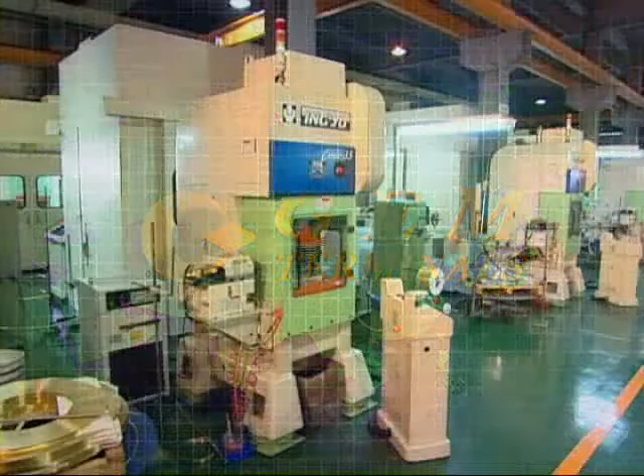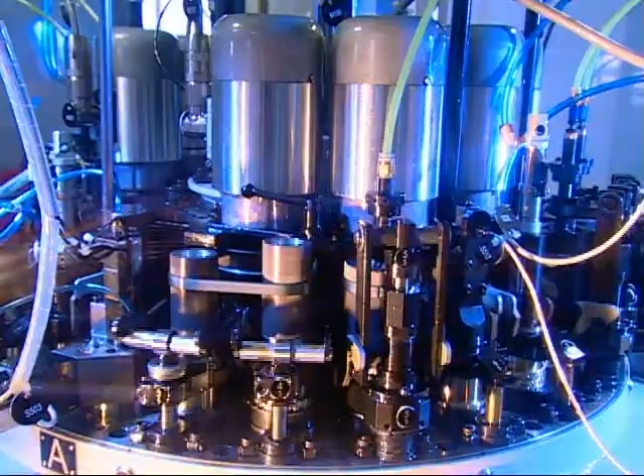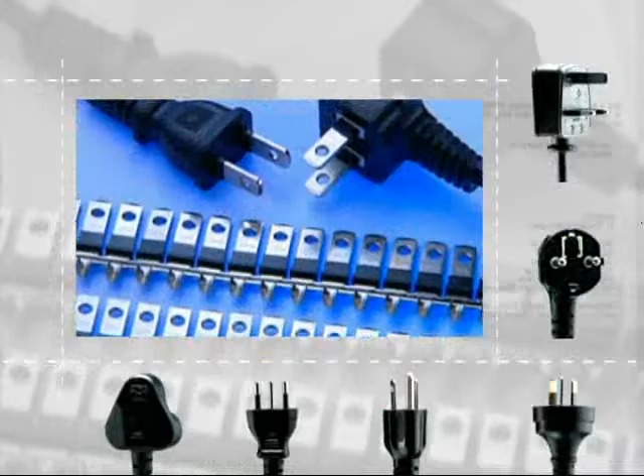It not only has the manufacturing capability with integrated turnkey operation, but also has advanced machinery facilities and capability in molding development with various kinds of products with superior quality, and has gained certificates from many countries so as to effectively provide its customers with satisfactory services, whatever aspects in the scale of operation, development capability, and the precision of its products. GEM has been considered as the best in the trade and has become the best cooperative partner in its customer's mind.

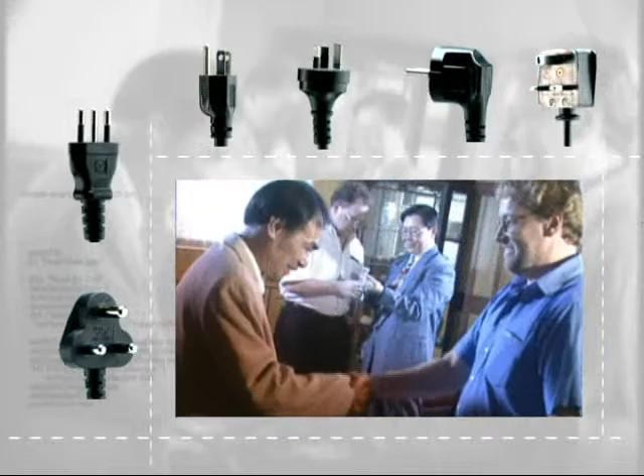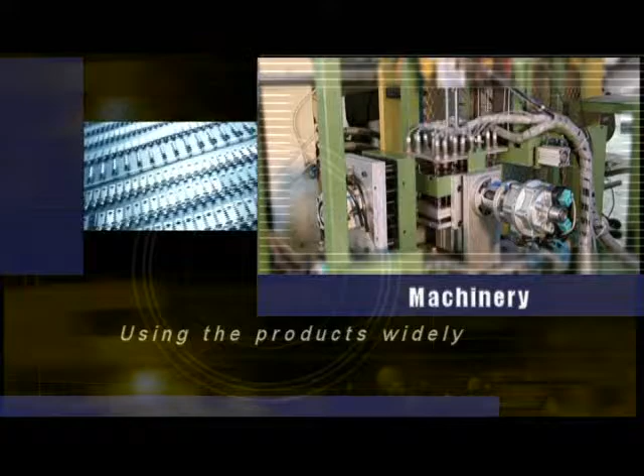Terminals are metal accessories that can be used to connect both electricity ends and can be widely used in electric appliances, products wiring, or telecom transmitting wiring for electronic and information products. They can even be extended to downstream application industries, including information, electric machinery, automobiles and motorcycles, power source plugs, telecommunication, architecture, machinery, measuring instruments, and lamps lighting, as well as others. You can see them everywhere. Terminals are truly small parts, big works.

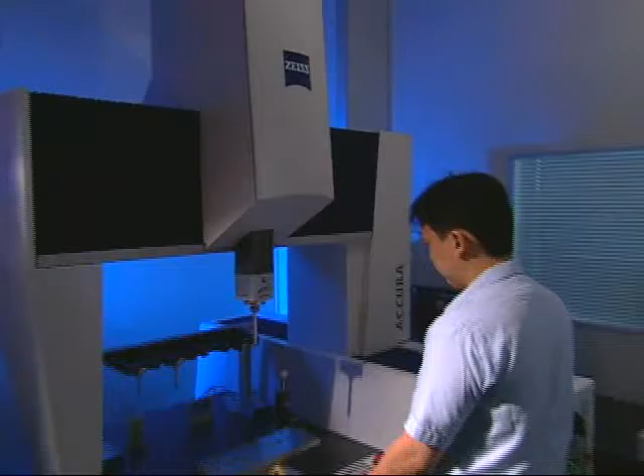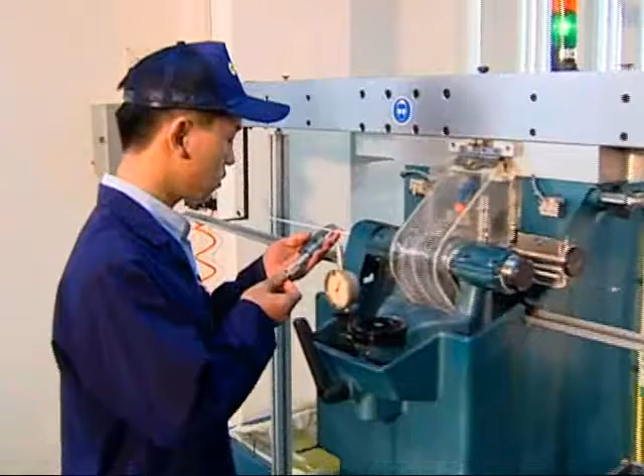Tiny as a terminal, what it can influence is a product and even the whole system. GEM has dealt with every terminal with attentive attitude and strict making process. From the primary products research and development, GEM has collected a strong technical team and continually accumulated experiences by progressively making information interchange with both domestic and foreign academies and institutes to continue developing the molding and manufacturing of new products, and also assist its customers to develop new products with its experiences of more than 30 years.

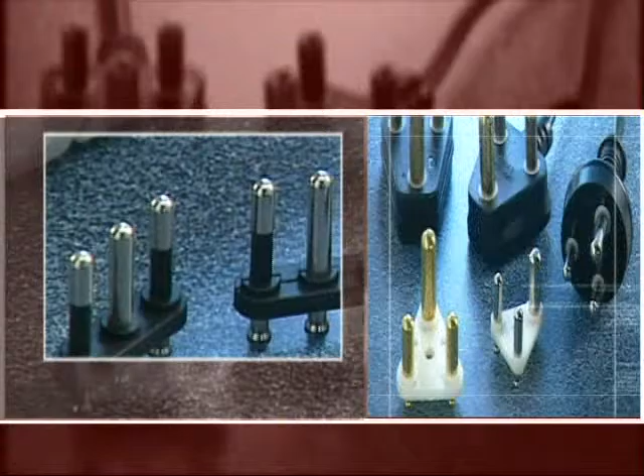The kinds of terminal are so numerous that they cannot be entirely developed, but under GEM's great effort and in coordination with the overall development of the domestic industries and conforming to the demands from the domestic power line factories, GEM has successfully developed its terminals applied to electric appliances like plugs. GEM's products have already contained the world's 4 major systems and has become the largest plug appliances terminals manufacturer in Asia. In order to satisfy the customer's requirements and to be connected with the market's trend, GEM has made its untiring efforts to continue developing new technology.

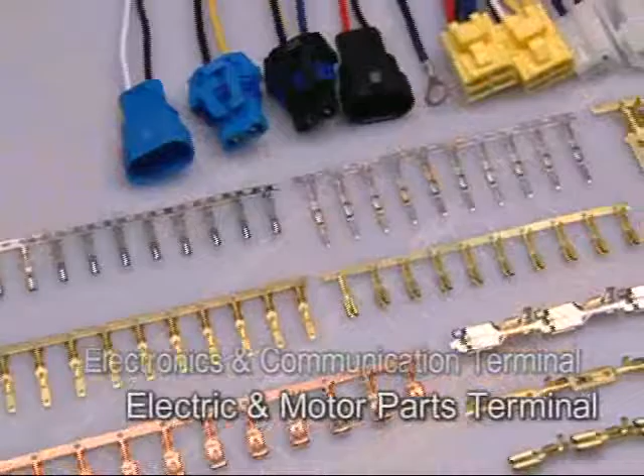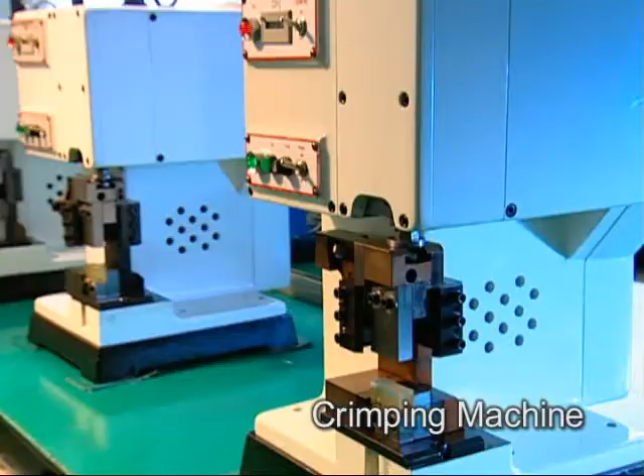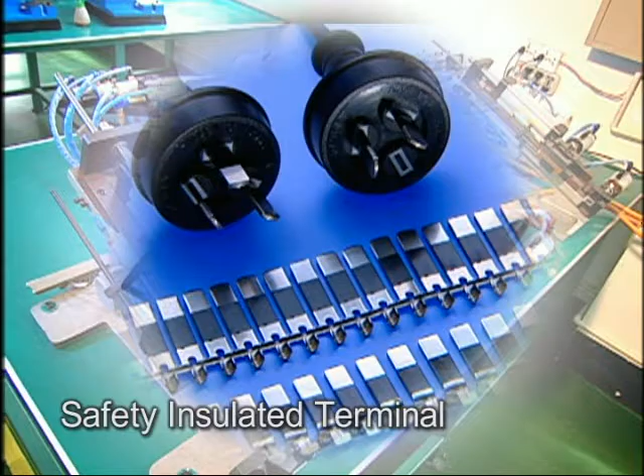Besides its terminal products for electric plug terminals, it also produces electronics and communication terminals and electric and motor parts terminals. It has also developed a series of terminals for related peripheral facilities, such as terminal crimping machine, air wire stripper, and so on, and is more progressively engaged in the development of ultra-fast flag receptacle and tabs and safety insulated terminal. There are over 1,000 kinds of products, and GEM has gained over 100 patents, both domestically and in foreign countries.

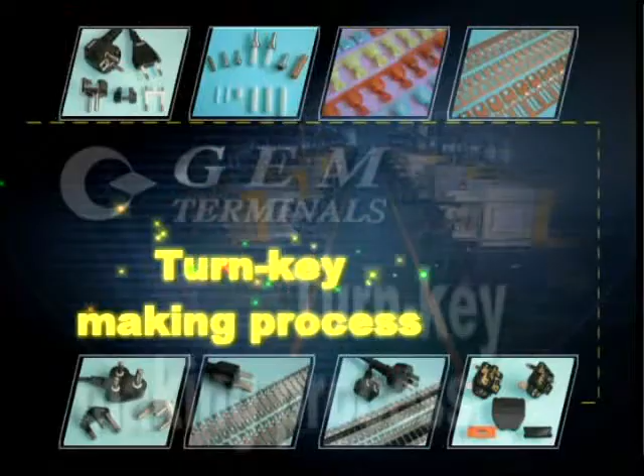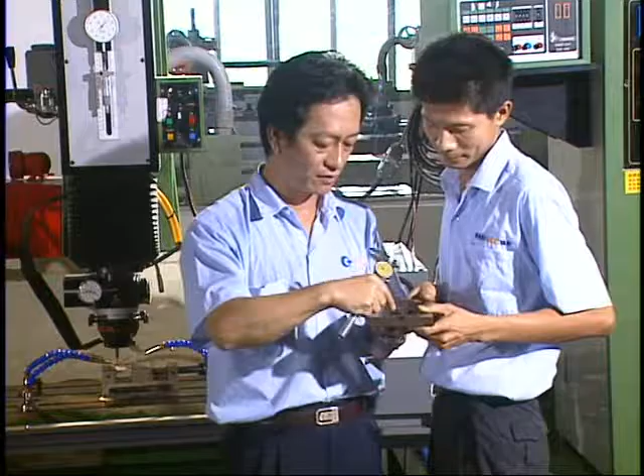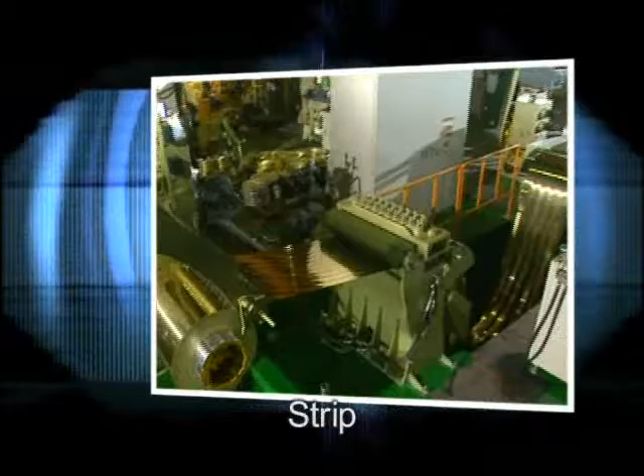The quality, yield rate, production efficiency, and price of terminals, and the integrated production specification have become the major keys for the major electric appliance and electronic products manufacturers to select the terminal suppliers. GEM has the capability of turnkey professional making process, such as production development, mold design and manufacture, strip, stamping molding, plastic injection, automatic lathe, plating, and automatic assembling operation.

In the development of plastic molding, GEM has adopted the application of computer-aided engineering analysis software like TopSolid New Product Structural Analysis and Mold Flow Analysis, and applied die dedicated software to the development of stamping molds to enhance the design quality of molds.

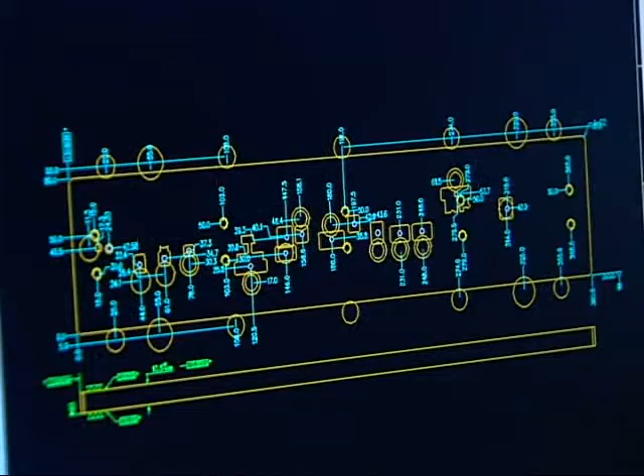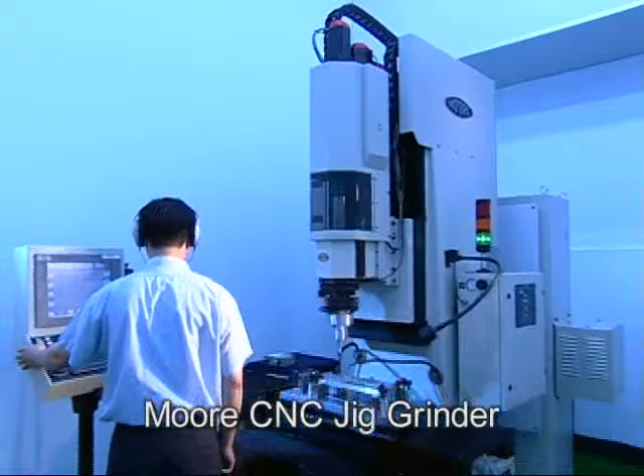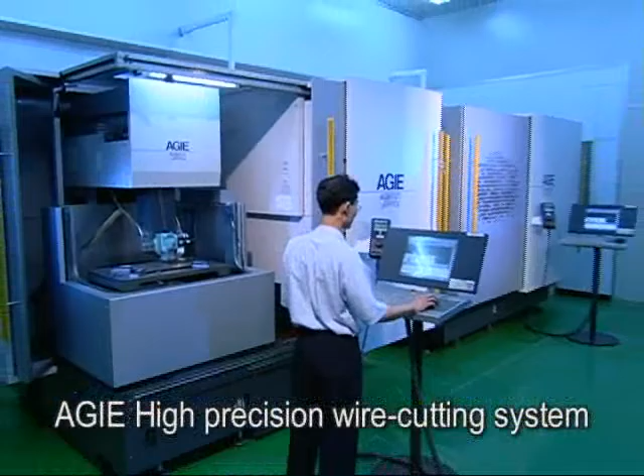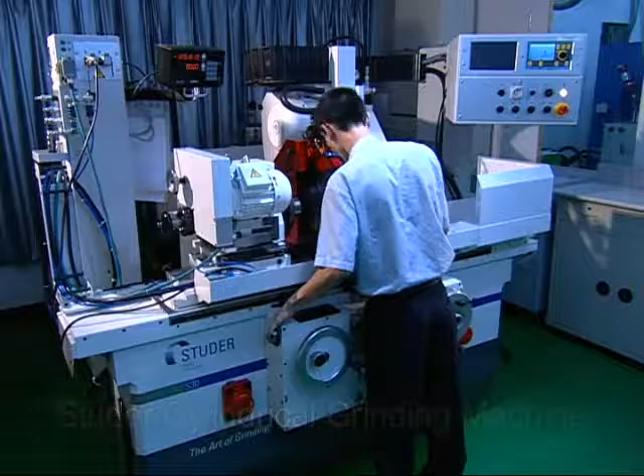In order to promote the processing precision of molds, GEM has introduced the most precise mold processing facilities, including Moore CNC Jig Grinder, Yasda CNC Jig Borer, and CNC High-Speed Vertical Machining Center, AGIE High Precision Wire Cutting and other high-precision wire cutting systems, Washino CNC Profile Grinder, Studer Cylindrical Grinding Machine, Technica Center Hole Grinding Machine, and others.

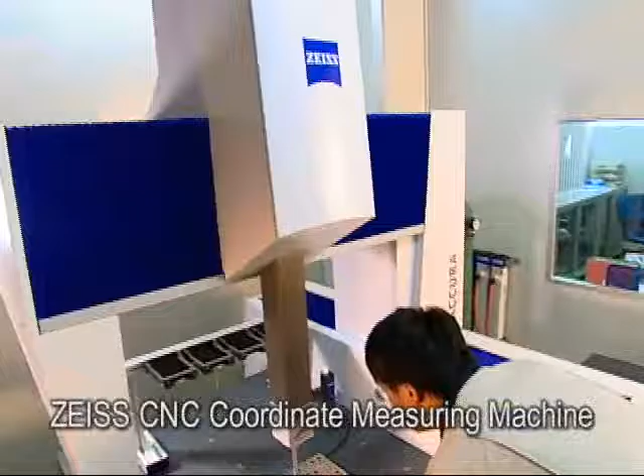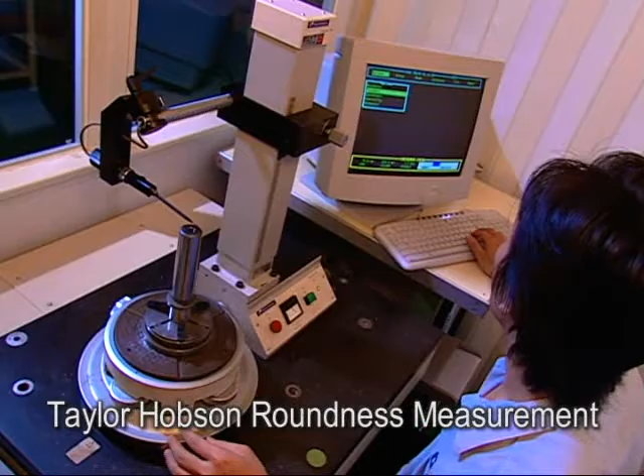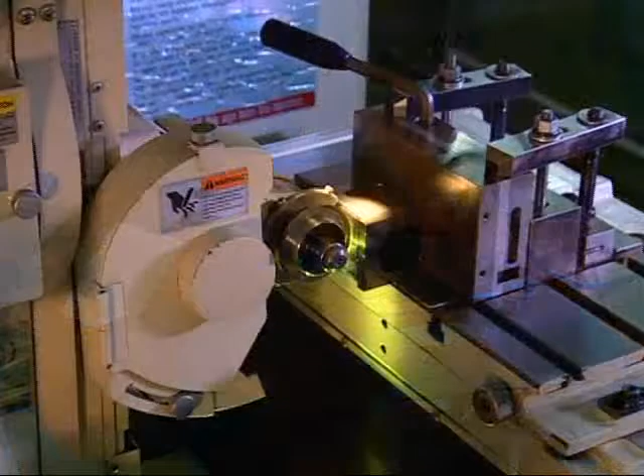In order to accurately control the quality of molds, GEM has further invested to purchase integrated measuring equipment such as Zeiss CNC Coordinate Measuring Machine, Werth CNC Video Measuring Machine, Taylor Hobson Roundness Measurement, Surface Roughness Measurement, Profile Projector, and stereoscopic zoom microscopes, among others, so as to precisely affirm the size, location, shape, and precision details.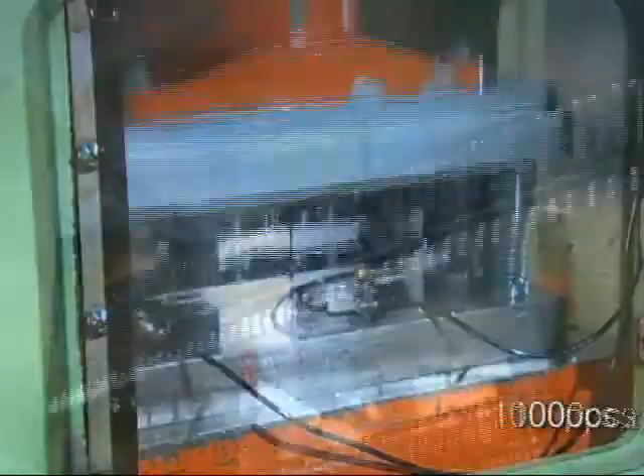In coordination with the development trend of light, thin, and compact electronic products on the making process, GEM has developed toward high speed, high precision, and automatic aspects. Especially in the stamping techniques, GEM has introduced high-speed stamping making process with large capacity with a speed over 1,000 pieces per minute to confront with automatic track winder and automatic packaging machine so as to further promote the machine utilization, to simplify the labor power, and to increase the production efficiency.

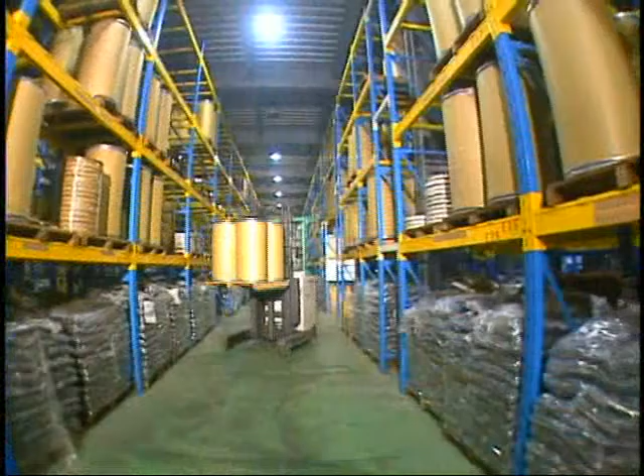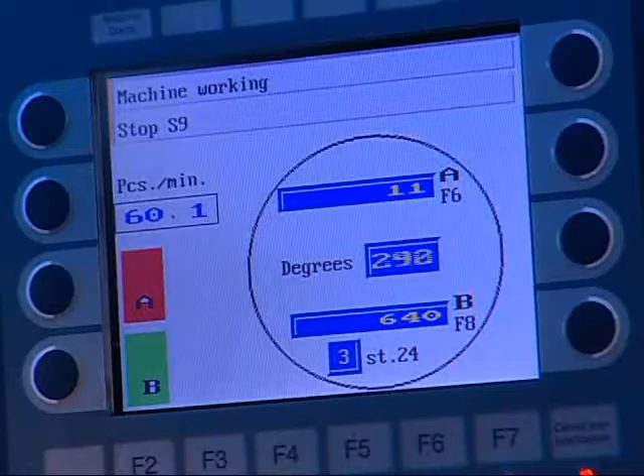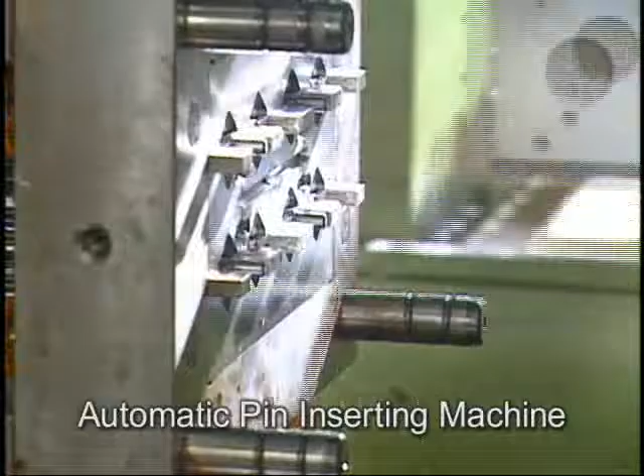On the aspect of turning manufacturing process, GEM has adopted the Multistar machine imported from Europe with high-speed cutting-making capability. The capacity of one machine is about 20 to 80 sets of traditional machines. The horizontal-type plastic injection machine, confronting with the automatic pin inserting machine, can avoid the defect of traditional style of one person, one machine. To promote the quality of electroplating, GEM has set up automatic plating line and rolling electroplating production line, together with its emphasis on pollution prevention.

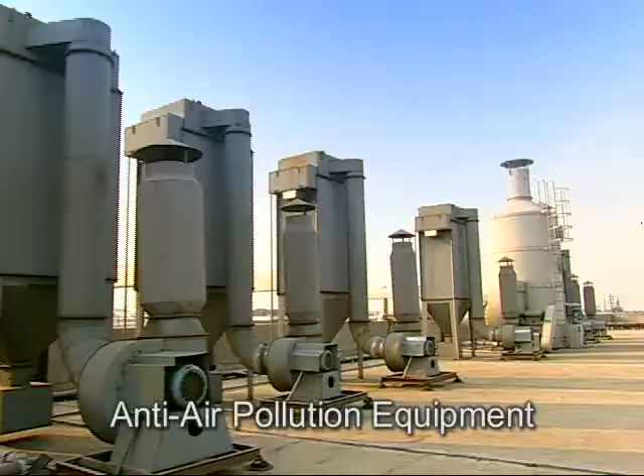It has already built up the purification tank for wastewater and the air pollution prevention facility with a high wastewater recycling rate of 60%, and delivered to the electroplating factory for recycling use, so as to thoroughly implement the tasks of environmental protection and afforesting.

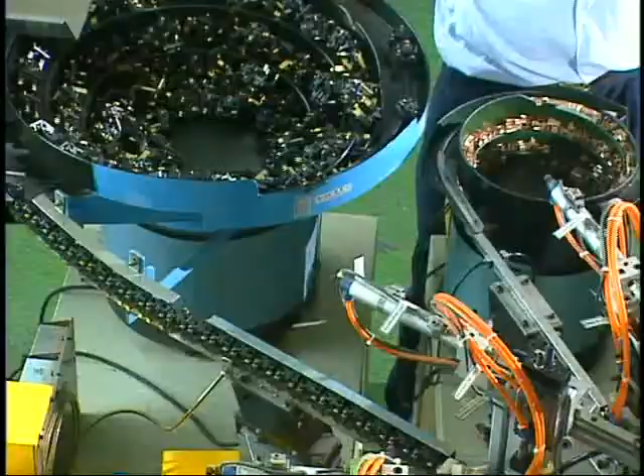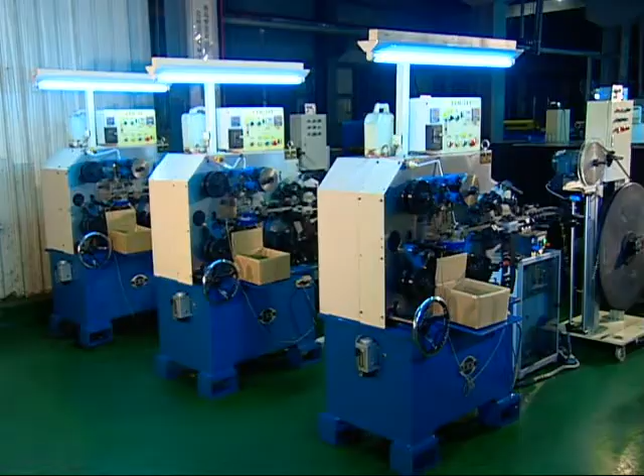In order to promote the production capacity, machine utilization, and yield rate, GEM is continually enhanced to improve the making process by introducing advanced techniques and automatic production equipment, and progressively carry out the development of each making process equipment, so as to set up independent capability matching customers' requirements, like the production of non-contact terminal products by quality promotion and cost decrease.

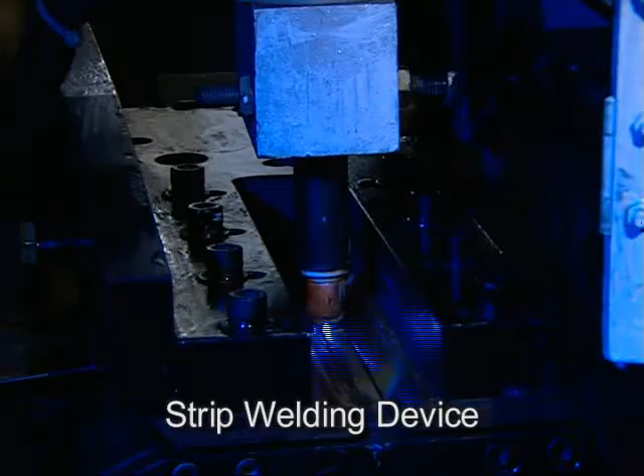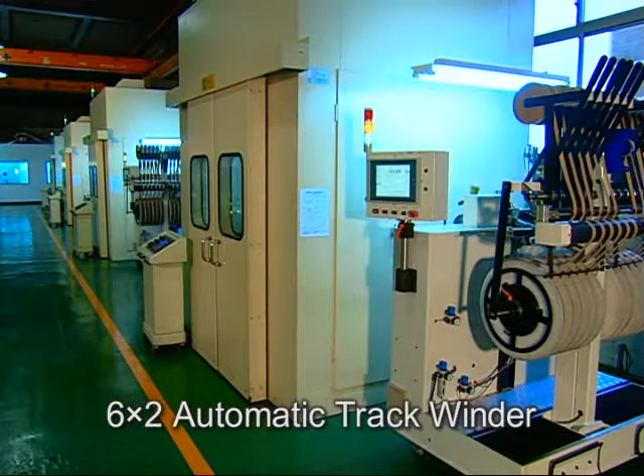GEM itself has sequentially developed strip welding devices and semi-product strip welding devices. In order to confront high-speed injection, GEM developed the 6x2 automatic track winder to promote machine utilization, production capacity, and overall competitiveness.

Besides, GEM has even carried out international labor division by establishing plants in mainland China and introducing an ERP system to effectively integrate resources in each place, so as to enhance the elasticity of production and satisfy customers' requirements.

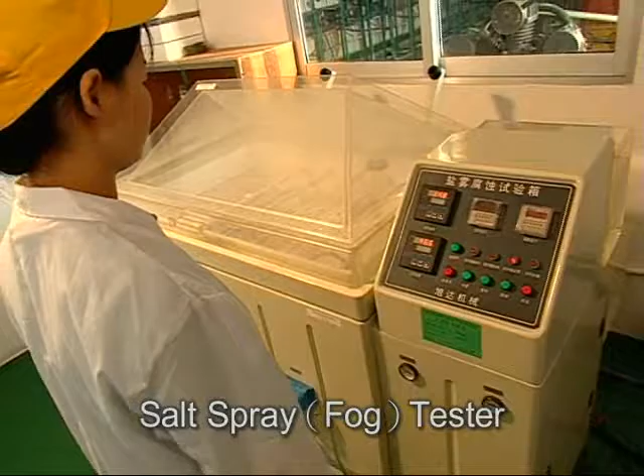Quality is the key to how GEM competes with foreign major manufacturers in order to pursue perfect quality. GEM not only demands every operator to fully control quality, but has also purchased many precise equipments to assist inspection, including mounting press machines,

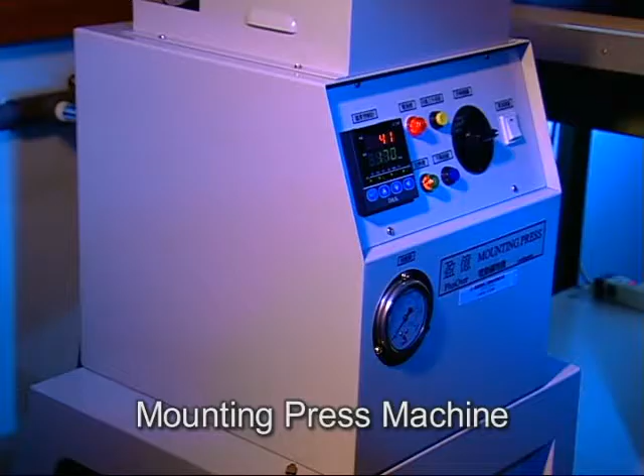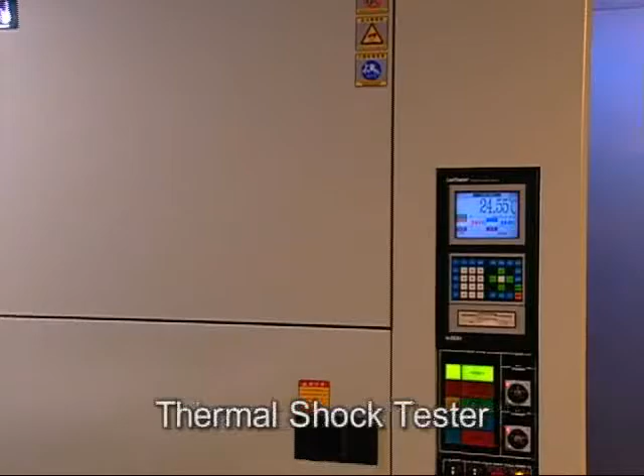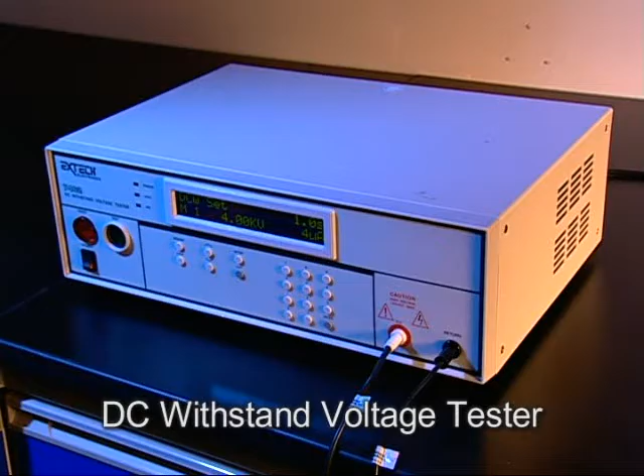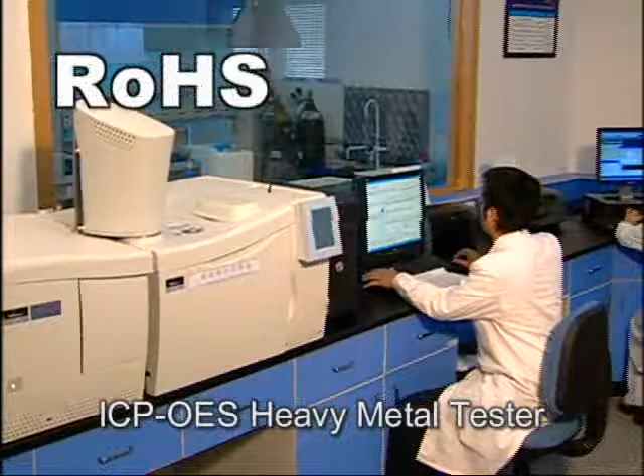To achieve the requirement of the EU's RoHS Environmental Protection Directive, GEM has even increased purchasing of ICP OES Heavy Metal Tester, GC-MS Bromide Tester, and UV-VIS spectrophotometers to examine the quality of materials and products.

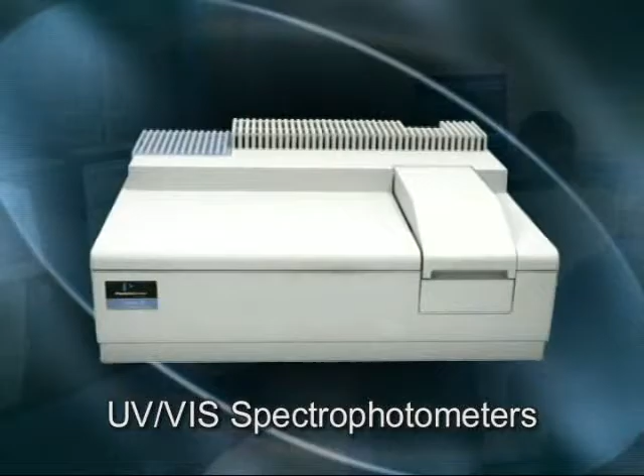Under each strict inspection of quality control, GEM has passed ISO 9001 and ISO TS 16949 certification. Its products have already gained safety certificates from many countries, such as US UL, Canada CSA, UK BSI, Australia SAA,

Japan PSE. In the future, GEM shall keep advancing with the establishment of the Safety Standard Isolation Type Plug Terminal in Taiwan's CNS, US NEMA, and China National Standard GB, among others.

And now the OBM of GEM Terminals, GEM, has become the symbol of high-quality terminals and also represents the guarantee of leading techniques, on-time delivery, and superior services.

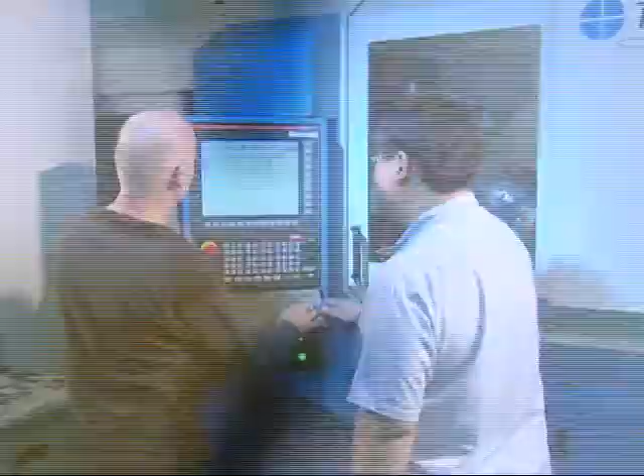In the future, GEM will keep contacting foreign manufacturers to grasp the trend and new knowledge and techniques to speed up product development and to promote production quality and making capacity.

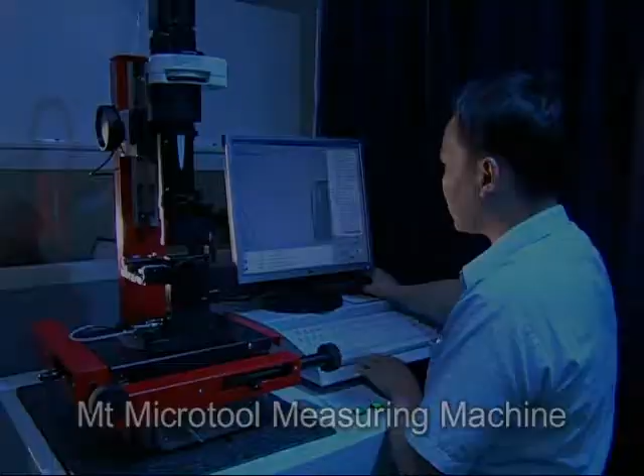GEM highly emphasizes the welfare of its employees, from the establishment of restaurants, medical treatment offices, and dormitories, to the advancement of each activity. GEM has thoroughly satisfied the requirements of its employees in their daily life so that they would concentrate on working hard for GEM.

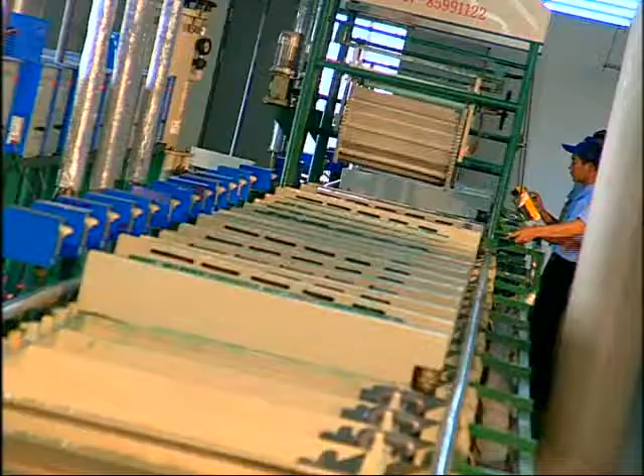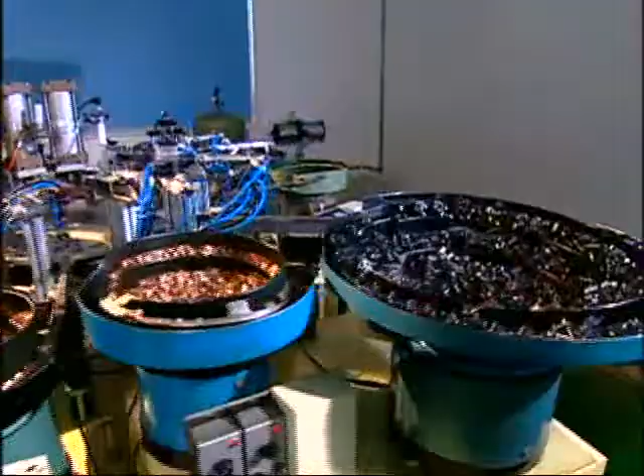In the future, on the overall arrangement, GEM will keep integrating and adjusting to provide its customers with diversified, high-quality products with superior competitiveness, and to progressively expand the marketplace to launch into the global markets, integrating advanced die technique from Europe to develop new lead frame products.

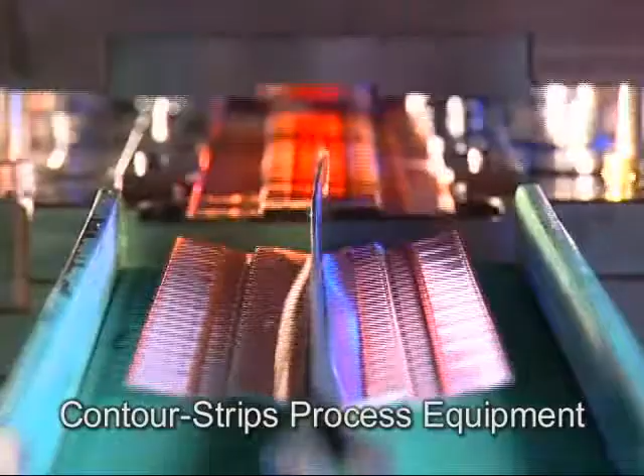These not only derive from terminal contour strip techniques and contour strip surfacing techniques, but GEM's own developed equipment is able to make the process of contour strips achieve super thinness, with an average thickness of 0.08 millimeters, which has reached the international level.

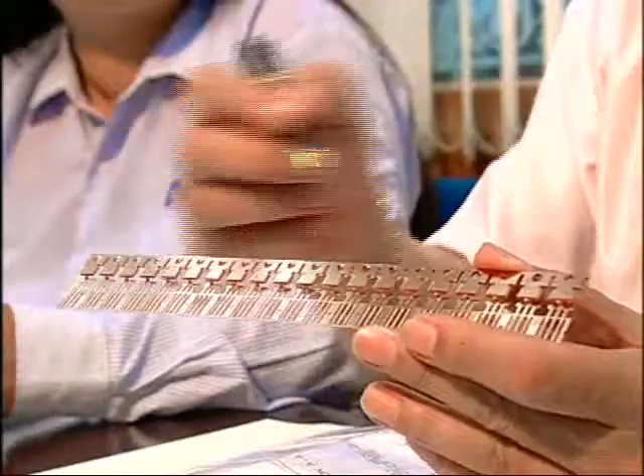In recent years, countries around the world have actively advanced broadband internet access. The optical communication industry has become a newly rising market with fast growth in the next era. GEM has grasped its original power cord products and extended them to optical communication components products.

By introducing the most professional ceramic ferrule techniques of whole-plant making process, with over 20 years of experience from Europe, GEM has launched into the production of optical communication passive components, and plans to vertically integrate materials to enhance competitiveness in optical communication components.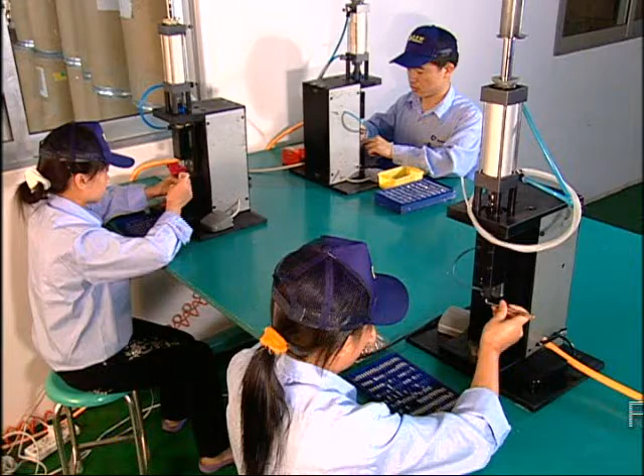Accordingly, from terminals to equipment, GEM will provide its customers with the most integrated know-how in terminals and diversified solutions. In 1993, there was no integral industry like automobile industries and electronic consuming products.

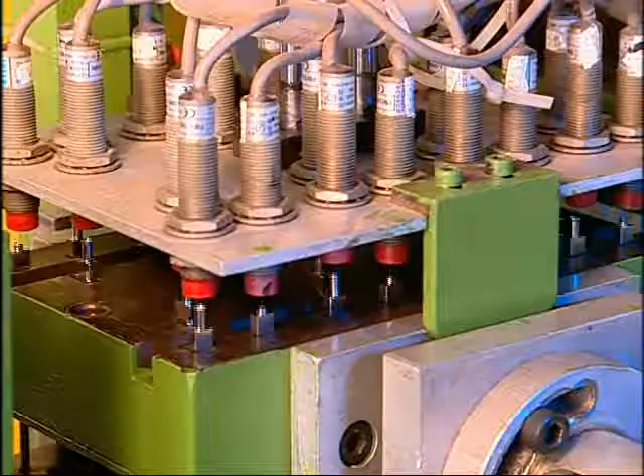GEM then decided to get involved in producing the power cord terminals required by the electric wires and cables trade, which had integral industrial development. This made GEM the #1 leading manufacturer of AC98 electric plug terminals in Asia.

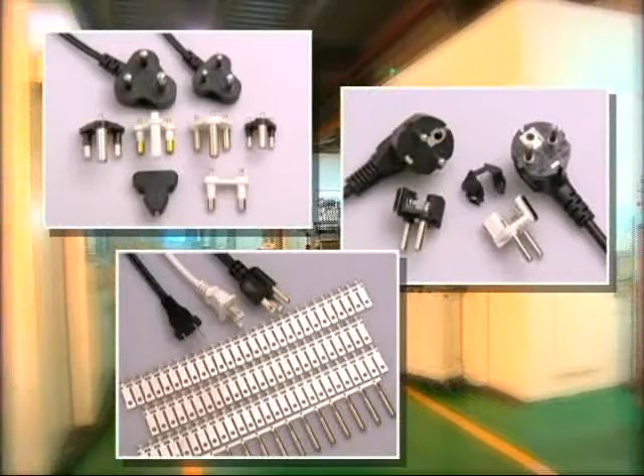Up to now, mainland China has without doubt become the world's manufacturer and the coliseum of each major automobile factory, and is the largest exporter of electronic consuming products.

GEM progressively finished establishing a plant in Suzhou in September of 2006. The domestic markets in mainland China for AC98 electric plug terminals have kept growing fast in coordination with the overall automobile industrial development in mainland China.

GEM has designed and developed 99 electric and motor parts terminals to match market requirements. Meanwhile, to match the overall development of electronic consuming products, GEM is expanding development and making of 92

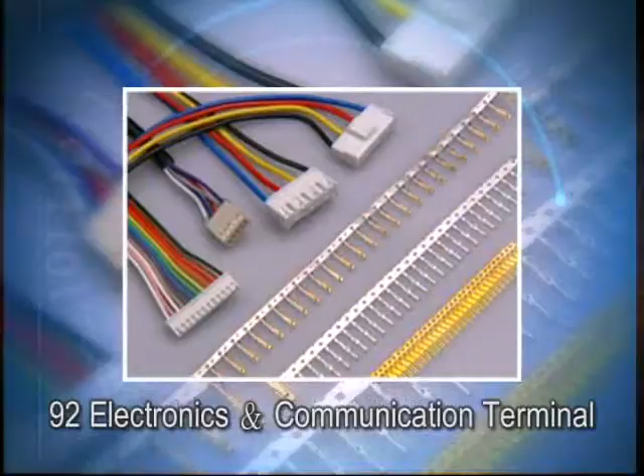electronics and communication terminals, which has brought GEM unlimited business opportunities.

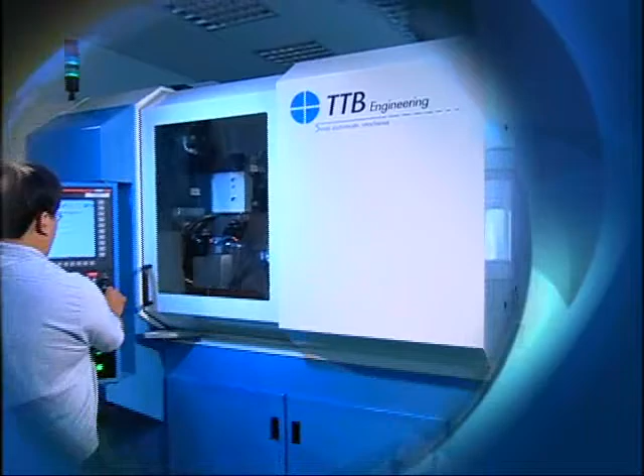Through the vertical and horizontal integration of terminal products and industries, continually developing new products and production equipment will not only make GEM's products diversified, but also increase its services of higher additional value, and will help GEM accomplish its goals of implementing the enterprise's substantial management and continual growth as well.